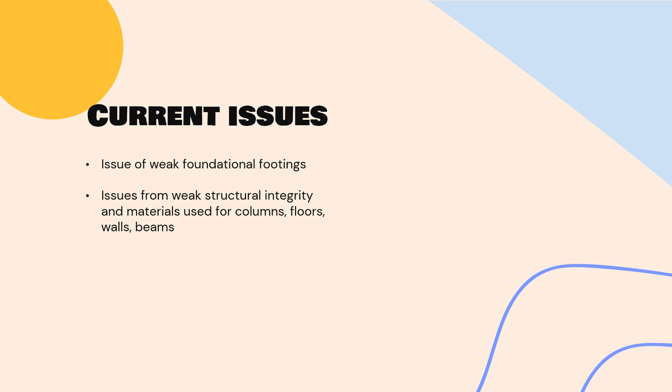Next, I'll be discussing the current issues. Number one, there's the issue of weak foundational footings. Number two, issues from weak structural integrity from the materials used for the columns, floors, walls, and beams.

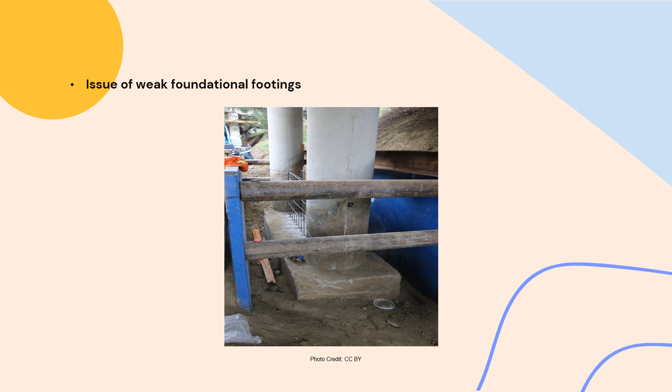With the issue of a weak foundational footing, the building won't be able to stand any seismic activity. There will need to be upgrades to how the foundation is supported.

The second issue is the structural frame integrity of the building. The author Mitchell, in his 2010 article, discusses that the Canadian National Building Code will need revisions in its materials and construction of buildings pre-1990s because of seismic activity. The floors, beams, walls, and columns will all need to be reviewed and how they were structurally built.

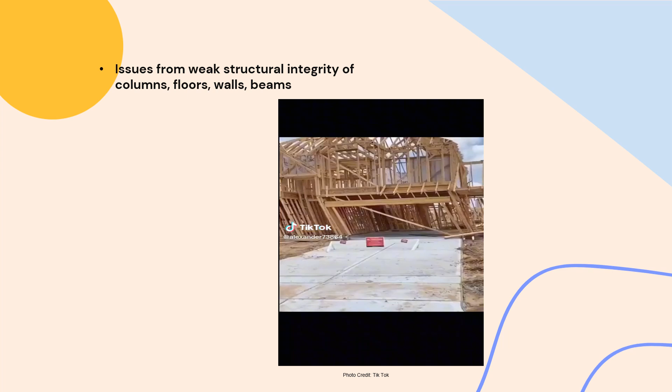Next, we will discuss potential project options. The first would be foundation improvements, and the second project would be structural frame reinforcements for the building.

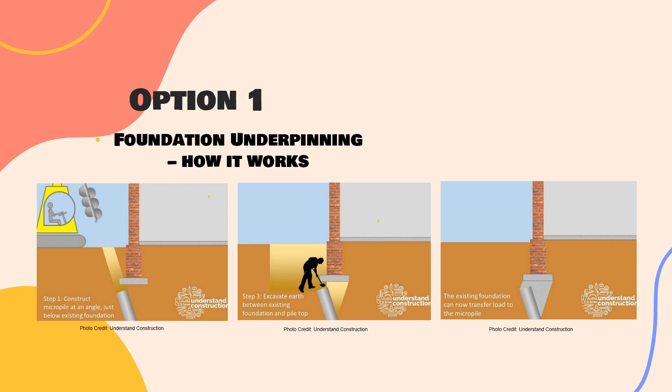Project number one is improvement through foundation underpinning. Foundation underpinning works by installing a new underground pile that goes beneath the existing foundation. With the new underground pile, it will connect to the existing foundation to be able to transfer some load away from the existing building. A technology for underpinning is the waveform micropile.

It uses a jet grouting method to generate a shear wave-like key in the pile shaft, which improves shaft resistance and stiffness. The drilling and concrete pouring are completed simultaneously, making for a very efficient process.

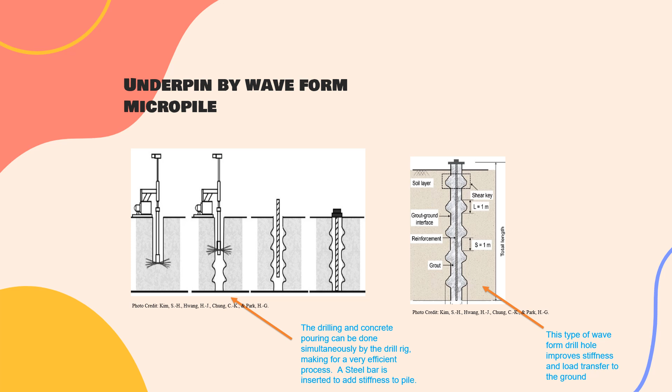Why underpinning? Based on a study by Han, Kim, and Wang in 2022, the underpinning process with its waveform micropile is able to transfer anywhere from 10% to 70% of the existing load onto the new micropiles.

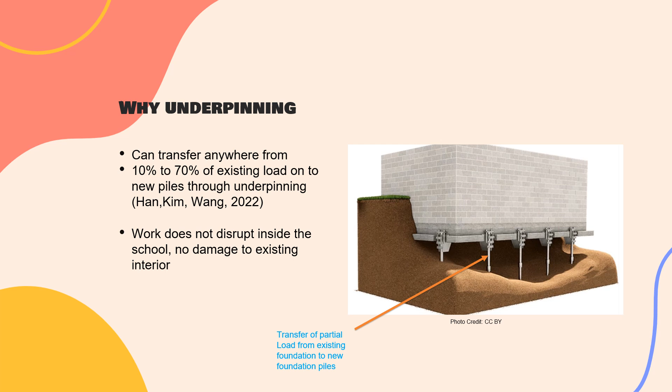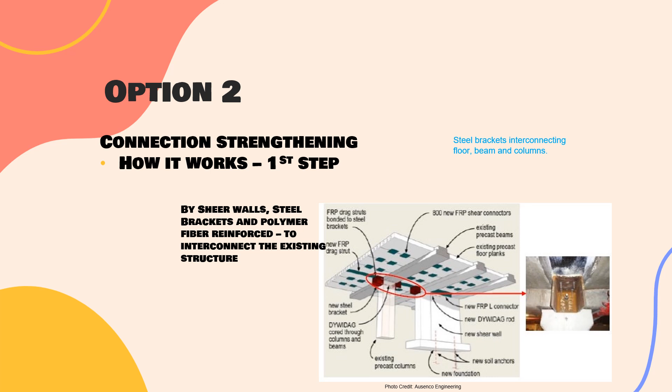Next, we have option 2, which is connection strengthening. Connection strengthening works by using shear walls, steel brackets, and polymer fiber reinforced brackets. All of these materials are used to interlock the existing columns, floor slabs, beams, and shear walls within the building.

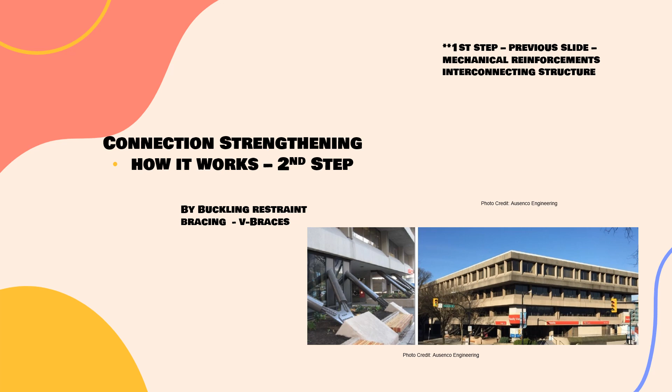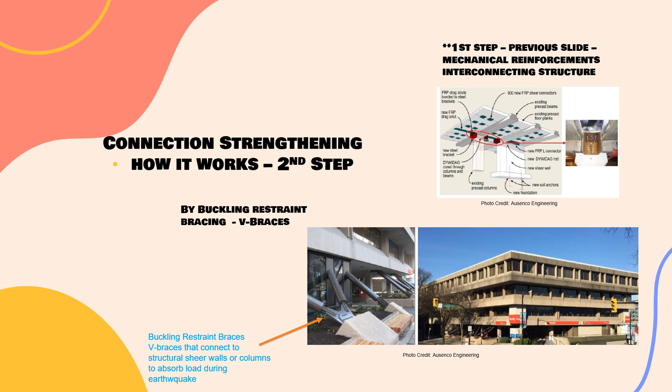The second step of connection strengthening is to use a V-brace. The V-brace connects to the exterior of the building onto a structural column or a shear wall. With the first step already done, the mechanical reinforcements of the steel brackets and polymer reinforcements, the load is then transferred to the V-brace, which holds the exterior of the building.

As you can see here in Victoria, BC, Tillicum Elementary has gone with buckling-restrained braces on an existing building to protect the structure from any seismic activity.

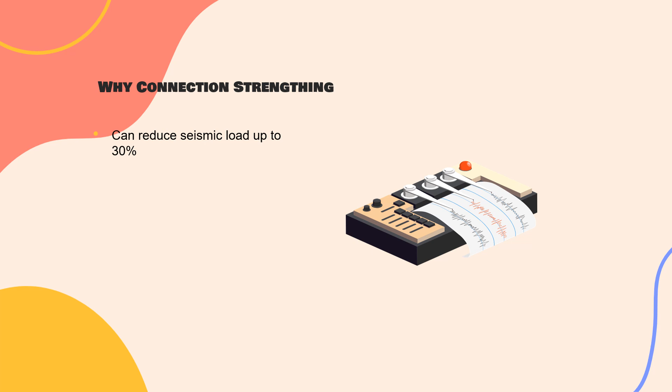Connection strengthening is a very good option. It has proven to be able to reduce up to 30% of seismic load through its mechanical reinforcements and V-bracing on the exterior of the building. It has also been able to achieve 100% of the 2015 Canadian National Building Code.

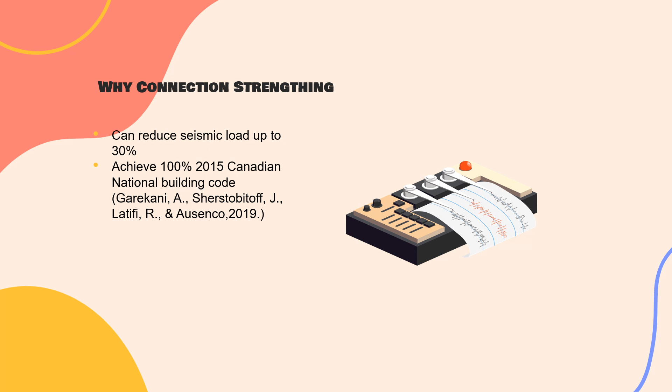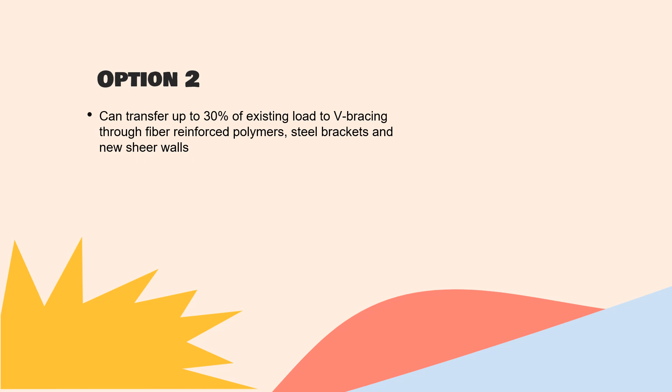My recommendation would be to go with option 2. With option 2, you'll be able to transfer 30% of the existing load onto the V-bracing through the mechanical reinforcements and steel brackets in the building. You'll also be able to achieve 100% of the Canadian National Building Code, and there will be no need for a new school, as you can reuse the existing structure, which also adds to sustainability.

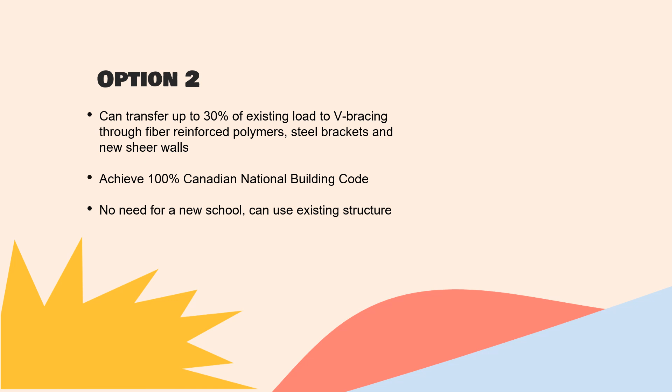Thank you everyone for watching my presentation. I think there's a way that we can reuse the older existing buildings in Vancouver through these sustainable engineering methods. I hope this was an enjoyable and informative presentation. Thank you very much.